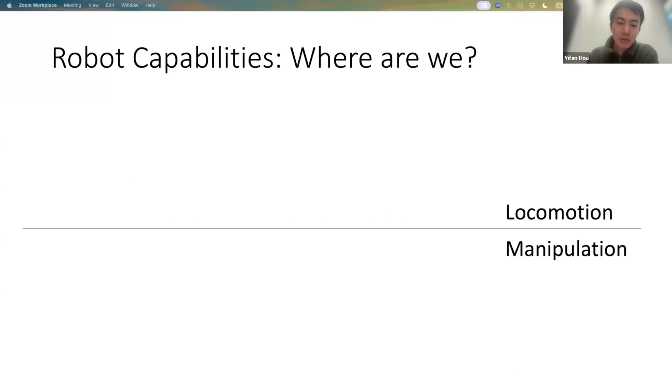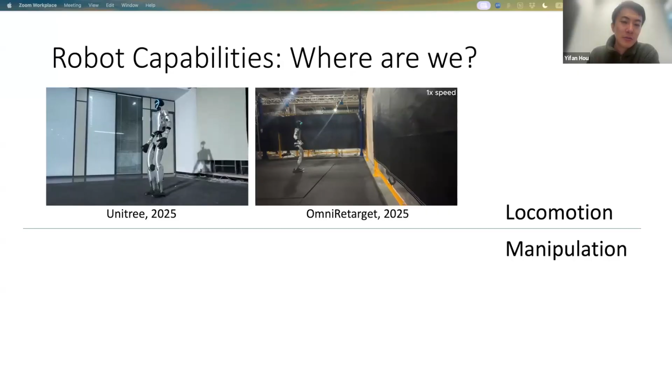This year in particular, we have seen so many interesting demos coming out from research labs and startups. A lot of people now believe robotics is close to being solved. I have a similar feeling when I look at those robots doing parkour and very impressive motion skills that I cannot do myself. But I got hesitant when I look at the state-of-the-art robotic manipulation demos.

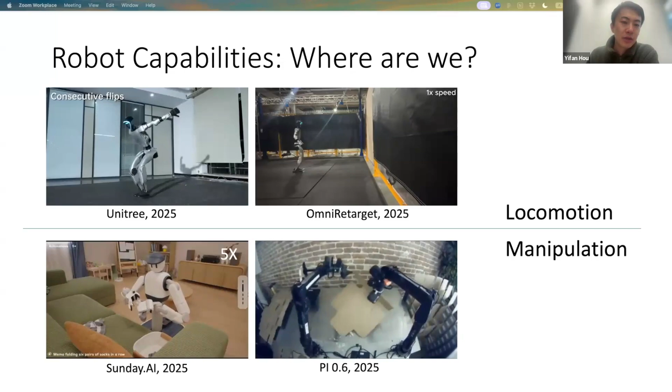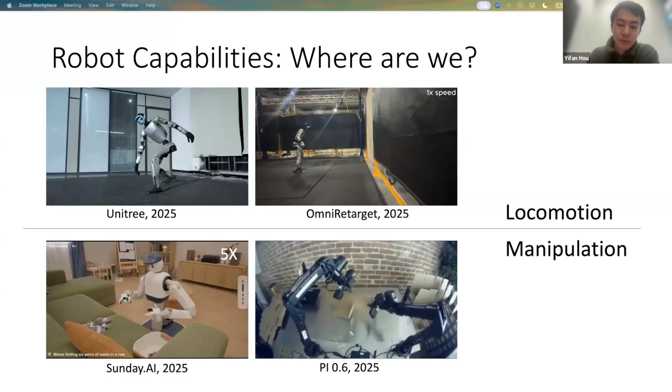To be fair, these demos are, in my view, extremely impressive. This is from Sunday on the left, and physical intelligence on the right. They both use a lot of imitation learning from a ton of high quality human data, and they are demonstrating autonomous behavior that was never possible before. But if we compare our robotics capability with humans, I think we can safely say that in terms of locomotion, a lot of our robots already have superhuman capability, at least super-me capability.

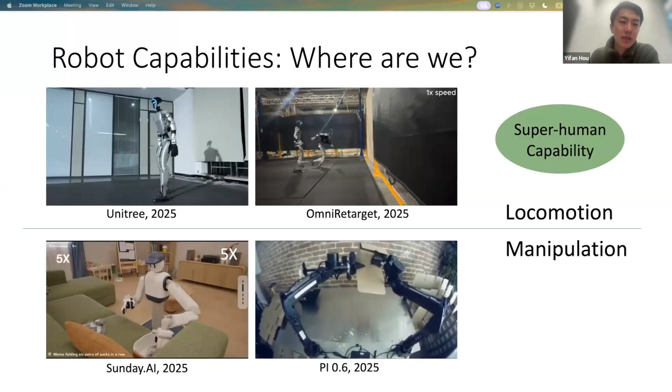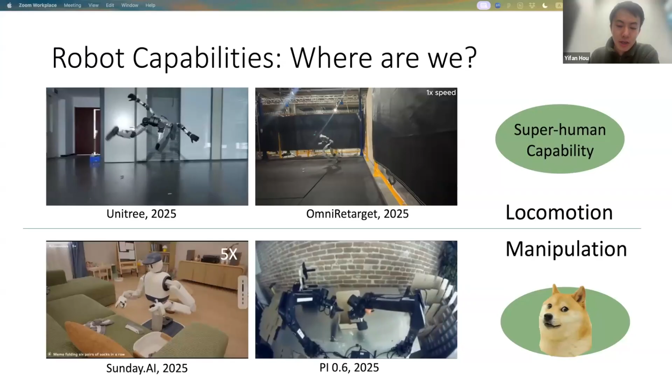I cannot do this. But if I show those manipulation demo videos to my mom, for example, she will still be confused, like why the robot is so slow or why it's taking unnecessary steps. So it appears to me that unlike the rapid progress in the locomotion community, the manipulation community is still struggling a little bit. Let's take a deeper look at why manipulation is so hard.

I think there are two causes of difficulty we need to be careful about. One is the fact that manipulation involves a lot of contact. Manipulation is the process of making and breaking contact, which means a small change or small error in position or force could directly result in failure.

For example, here the robot is trying to install a light bulb. There is a tiny slot on the base where the bulb needs to be aligned into. But the robot policy is off by maybe a few millimeters, so it misses the slot, and no matter how hard it pushes down, it cannot install the bulb.

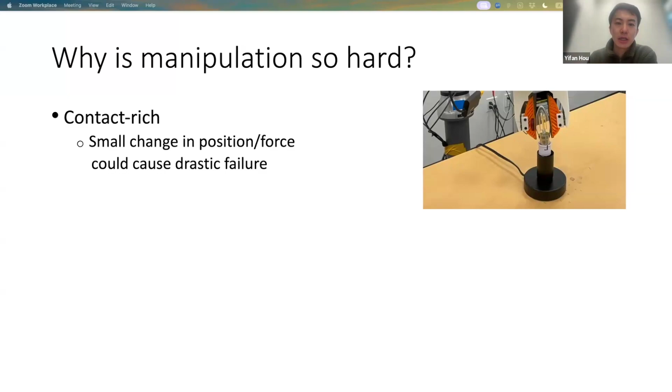The second type of difficulty is the uncertainty in manipulation problems. Because manipulation is a process of interacting with your environment and dealing with items in it, you won't have perfect sensing on the environment. Sometimes you don't even have good sensing on the robot itself. So all those uncertainties just increase the possibility of failure.

So it's really critical for manipulation to be robust. They need to succeed regardless of all those uncertainties. Otherwise, we will never be able to really deploy manipulation systems in the real world.

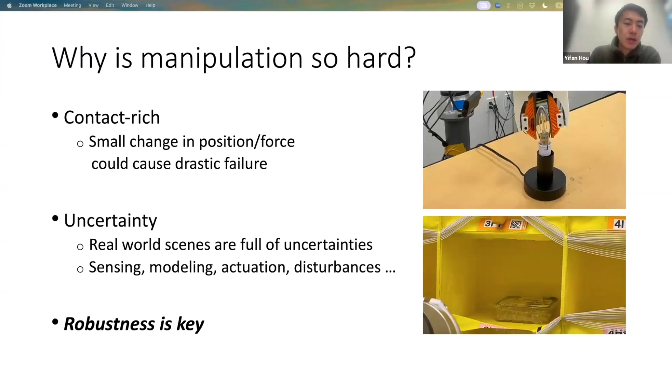A natural question to ask in 2025 is, isn't that just a problem of scaling? A lot of people in industry, especially Google, truly believe you can solve robotics by just doing what they are doing, collecting more data and training bigger models. I think yes and no. If you really have sufficient data, you can do it. But in general, it's a very non-trivial task to collect sufficient data for every single task.

Nowadays, for any non-trivial manipulation task, no matter how big your pre-trained model is, you still need to collect quite a big amount of task-specific data to fine-tune or improve that task. For example, this is a demo from Google Gemini, a very impressive demo where the robot can route belts on pulleys. But for this task, even with a giant pre-trained model, they still needed to collect anywhere between 2,000 to 5,000 additional demos specifically on this task for it to work. That's not very scalable, especially considering the vast variety of real-world manipulation problems.

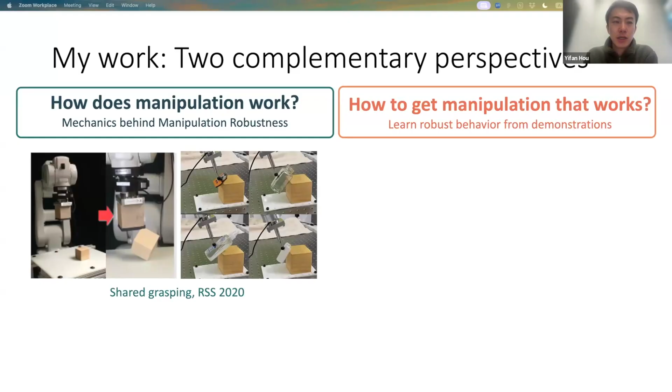In the later half, I will talk about the other, subjective perspective: how can we get manipulation that works, and how can we learn robust behavior directly from human demonstrations? Here I will discuss two works: ACP, which introduces force and compliance control modalities into imitation learning, and CR-DAgger, which improves a pre-trained manipulation policy from human corrections.

These two perspectives support each other. The mechanics part provides principled guidelines about the design of learning systems, whereas the learning system improves the generalization ability of the mechanics-based method, because you don't need to do a lot of modeling.

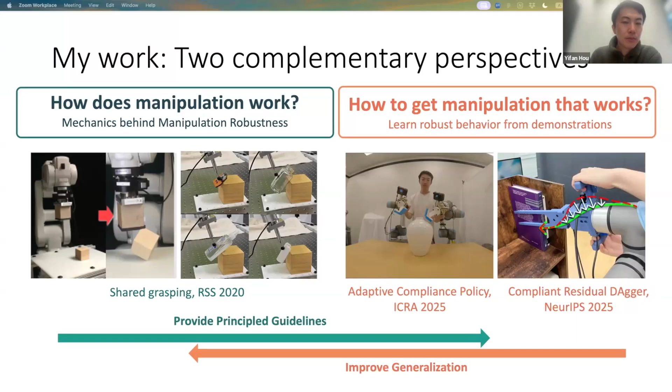So that's the overview, let's jump right to it. Before I talk about the mechanics behind manipulation robustness, I want to first introduce a concept some of you might have seen in my previous talk at Duke. I did a lot of work related to compliance - I think it is the foundation of manipulation robustness.

Roughly speaking, compliance is a model property that describes how a robot's motion responds to force. It's a property that humans are really good at using. If a robot has low compliance, it means the robot is heavy, stiff, or very rigid, so its motion will not easily be changed by external force - like if I'm holding a plate towards myself and there's an obstacle, I can basically push the obstacle away.

But if I'm stopped by some rigid obstacle unexpectedly with low compliance, I'm going to create a lot of force. On the contrary, high compliance basically means the robot is soft or light, and humans are really good at utilizing different types of compliance.

But for a robot, I want to formally show first why compliance is necessary for manipulation, and talk about how we can compute the best compliance profile for a manipulation task.

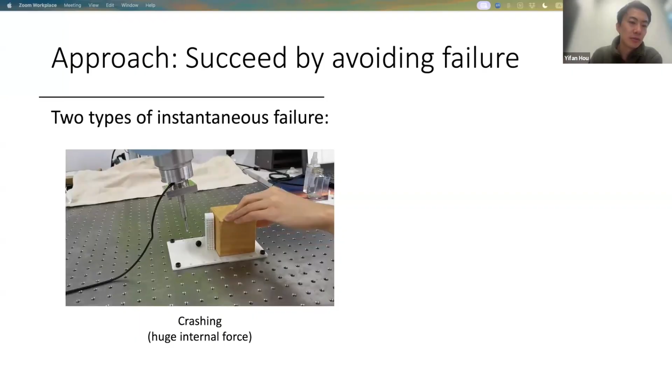First is crashing, which basically means the robot is somehow creating a huge amount of internal forces while moving to somewhere, and that could break your modeling assumption and cause damage. Second is unexpected contact changes, meaning your contact mode might suddenly switch to an unexpected one. There are usually three different types of contact modes: sticking, sliding, or separation.

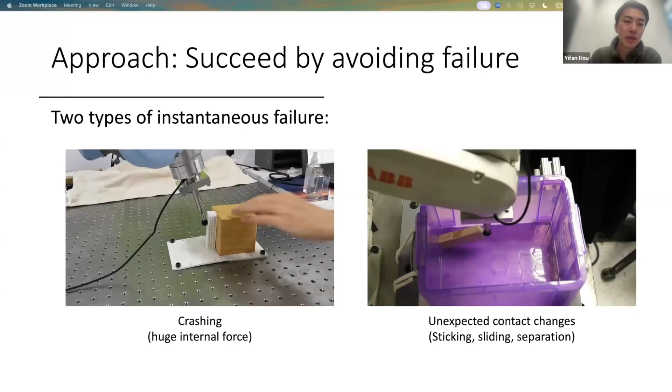This section will be talking about an analysis and solution around these two failure cases.

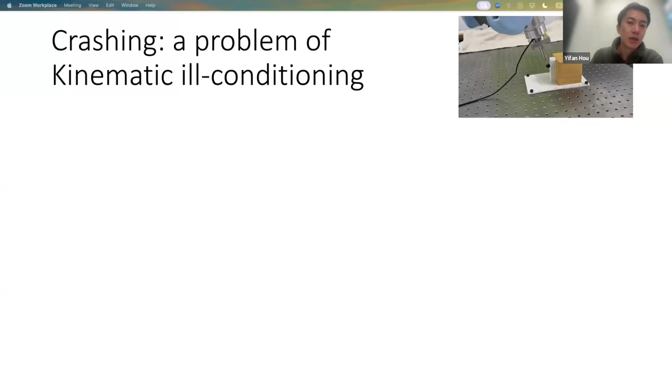For the first failure case, crashing, we want to know why a robot system can have a huge amount of force. That's because even if you do not command a large force to the robot, you can still cause huge internal force because the high stiffness of the robot control effectively serves as a constraint. This constraint might be conflicting with the constraint from the environment. Each manipulation system at any time instant can be modeled by a system of constraints.

The environment constraints basically come from the contact. When there is a contact, there should be no penetration, and if the contact is sticking, then there should be no sliding motion. So they impose some linear constraints on the system velocity at any time instant. Meanwhile, if the robot is trying to follow some trajectory precisely, this control also imposes a constraint on the system velocity. And when these two constraints conflict, they will attempt to create sufficient force to satisfy the constraint, which is not possible. So the modeling will break, and you will see a ton of internal forces.

This constraint-based point of view can help us think about how to avoid this crashing situation. We cannot change the environmental constraints, but we can change the robot control. We can let go a bit of the control from the robot, and this can be done by standard compliance control techniques.

Sorry, I lost connection to my monitor a little bit. Let me start sharing again. Take your time. Can you see my screen now? Yes. Great, great, great. Nice.

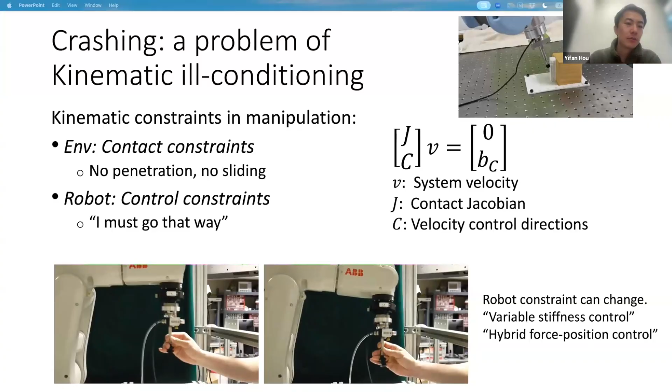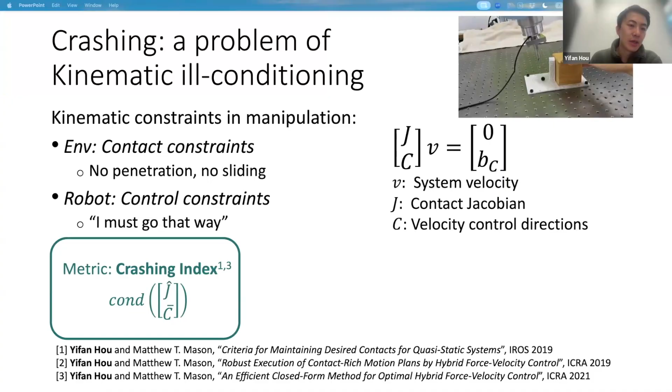Now the robot is only applying constraint in the directions where it is stiff. And if we can change the robot control, we can change the constraint in this equation. From the knowledge of linear algebra, we can use the condition number of this linear system to describe how close a system is to being ill-conditioned. This can be used as a robustness metric, and once we have the metric, we can try to optimize it, finding a compliance control plan that is very robust to crashing.

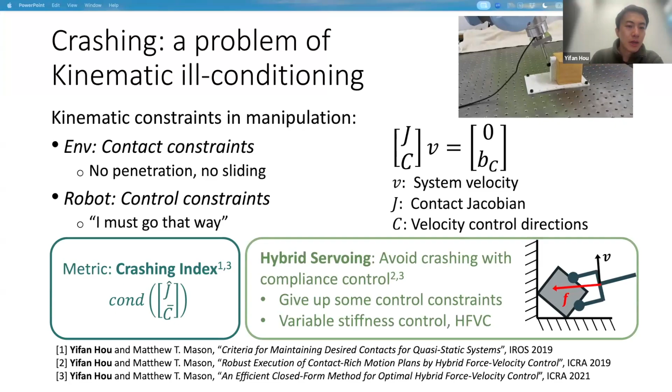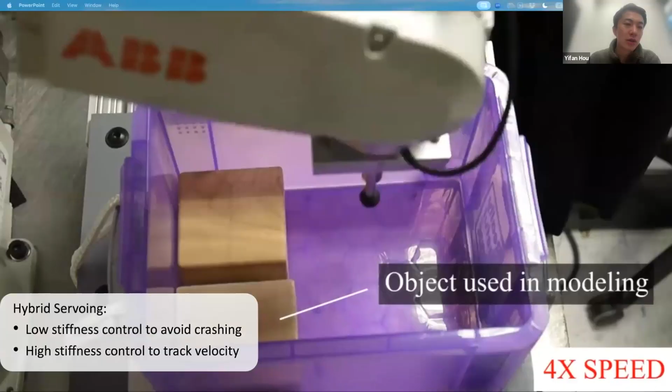I call this algorithm hybrid servoing. Here's how it works: it divides the robot's action space into low stiffness control and high stiffness control. The low stiffness control portion helps avoid crashing and avoid conflicting with other constraints in the system, whereas the high stiffness control can maintain precise tracking of your desired velocity.

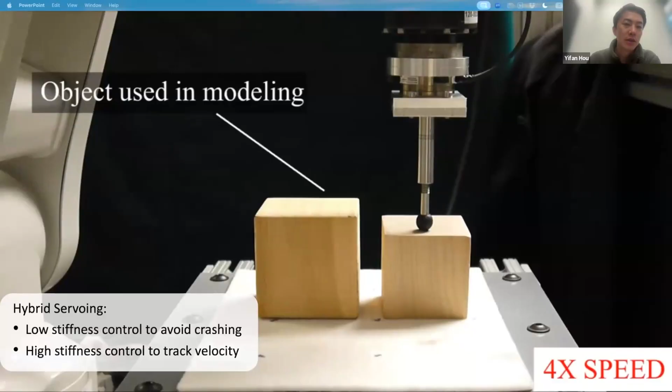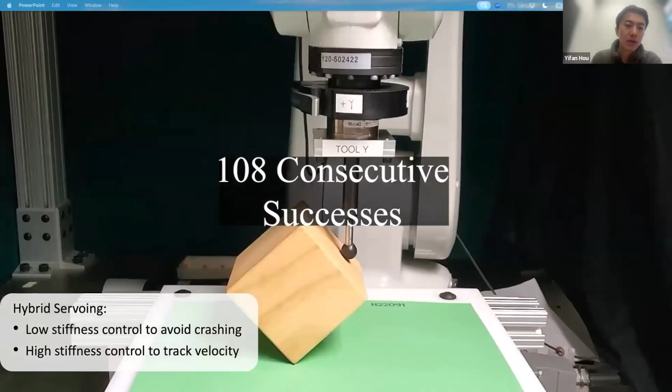As shown in the video, we can execute the desired motion while enduring modeling uncertainties. Since we have a margin of success, we can make the execution very robust. For simple tasks, we can run it many times in sequence with all successes.

Hybrid servoing seems to work pretty well, but that is not the end of the story. We still have the problem of mode ambiguity, meaning when you are executing the same control, multiple contacting modes will be possible. So you still cannot simply enforce the same desired contacting mode. The key to dealing with that problem is to come up with a distinguishable representation of contacting modes.

The representation I propose is to use the range of feasible forces in the robot range space for each contacting mode. That might be quite abstract, so I'll give you an example. Let's say the robot is a block and the object is another block, and for simplicity let's consider a 2D case where we can model the mechanics of the system with 4 contacting points.

Each contact point could be in one of the 4 contact modes. We can draw the range of feasible forces that can possibly be exerted by the robot, and it will be a 3-dimensional range space. In this range space, we will see a cone.

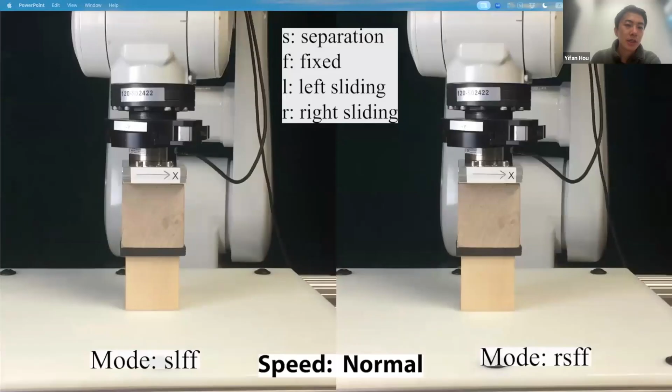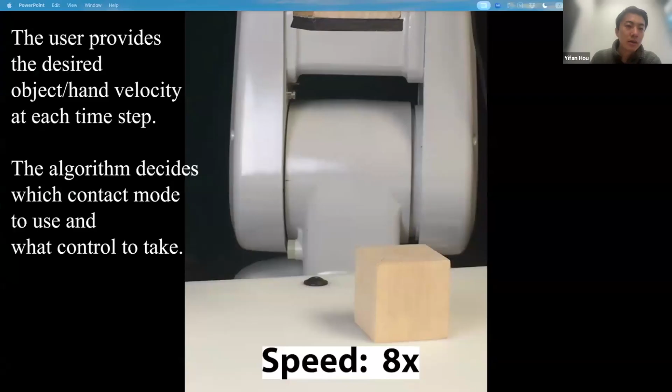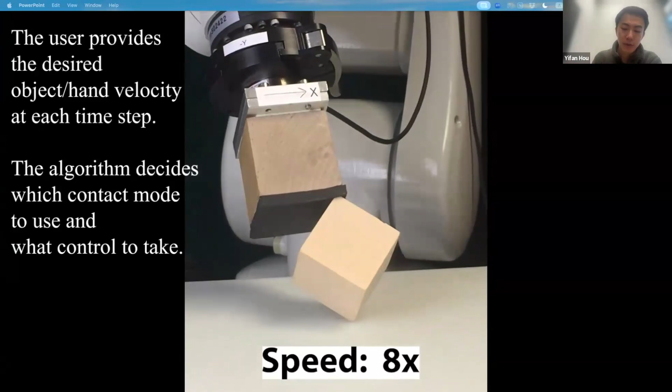Here are some examples of applying shared grasping to different contact modes, where the computed control can safely execute all the feasible contact modes in this example. And you can sequence different actions together to achieve some pretty difficult motion, like lifting and flipping this block, which is pretty difficult to do even with a human hand.

A natural extension of the stability margin is to improve motion planning. So we can do control, but can we extend that to a longer horizon planning? This is in collaboration with Xianyi, where we incorporate the stability margins in sampling-based planning.

If you are familiar with sampling-based planning, it is an iterative process where we iteratively try to grow a tree from the initial state to a goal state. At every iteration, we randomly sample a state in the robot's state space. Then we find the node on the existing tree that is closest to the newly sampled node, and try to grow this node towards it.

We make 2 key changes. One is that we not only grow one path, we enumerate all possible contact modes at this node and grow a path for each of them, so we can have multiple branches at the same time. Then we evaluate the stability margin for each of the new branches and trim off the fragile ones. This way, we can run sampling-based planning while maintaining a very robust tree.

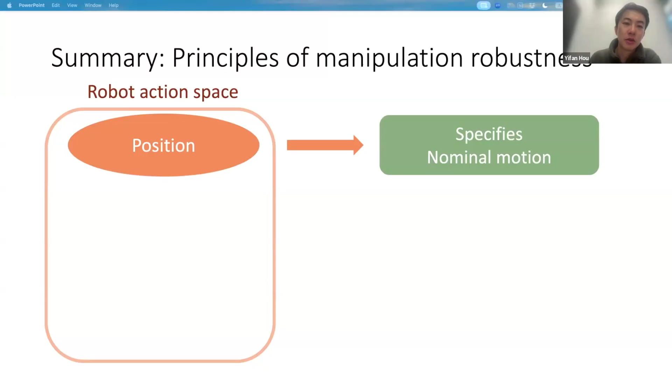A quick summary of the principles of manipulation: we are basically trying to fully utilize the robot's action space. Most existing work already uses the robot's position to specify the nominal motion, but in addition, we show that you can also specify a compliance profile using hybrid servoing, which helps you avoid kinematic ill-conditioning or avoid crashing. Lastly, you still have some degree of freedom in force control, and you can use that to help you select a contact mode reliably.

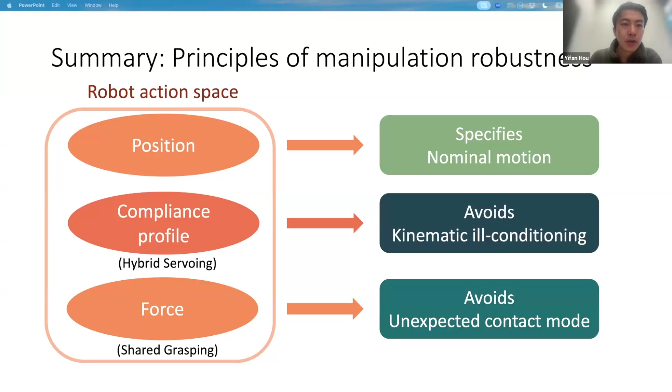Any questions so far for the first part? Cool, I guess this part is very easy for you guys.

So we talked about the mechanics, let's move on to the second part, a more subjective perspective. From the model-based analysis, we know compliance is very useful, and I thought that was just common sense, but I'm surprised to know that in the learning community, most people don't do that.

In 2023 to 2024, there were a lot of emerging imitation-learning-based visuomotor policies, but most of them are purely position-based — they just map vision to position. They're missing force and compliance. This is not sufficient or complete for describing manipulation.

So I tried to give this capability back to imitation learning, by first taking a popular existing imitation learning framework, the diffusion policy, and adding force input, force encoding, and force output to it. In addition, we also let the policy predict compliance parameters. All the outputs — force, position, and compliance parameters — can be executed by any standard compliance controller. The key challenge here is how do we compute the compliance parameters?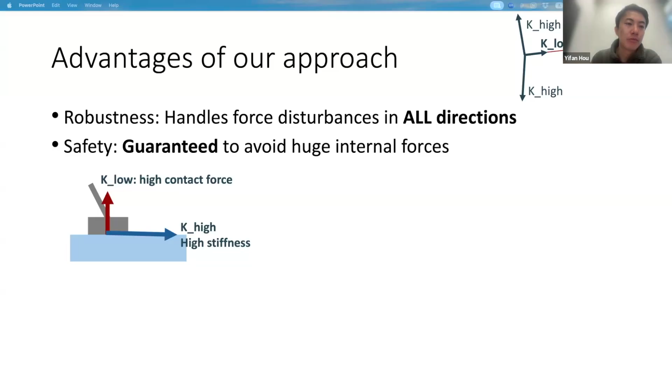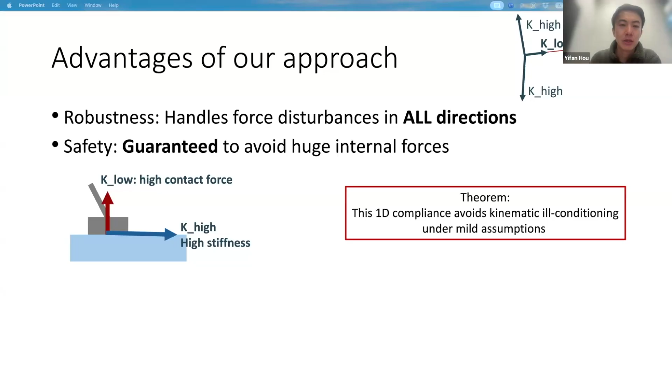Secondly, under mild assumptions, we can prove that this choice of compliance profile can avoid crashing. It will not cause kinematic ill-conditioning. Thirdly, this choice enables us to use a pretty compact and intuitive action space.

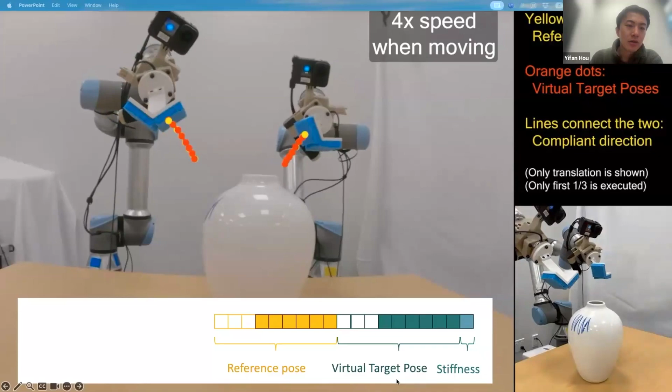So this is what the policy predicts. It predicts a reference pose, which is the same as a typical robot policy — this is where the robot is supposed to be — and also a virtual target pose. The virtual target pose is where the robot controller attempts to go to, and a stiffness value for the one-dimensional high compliance control.

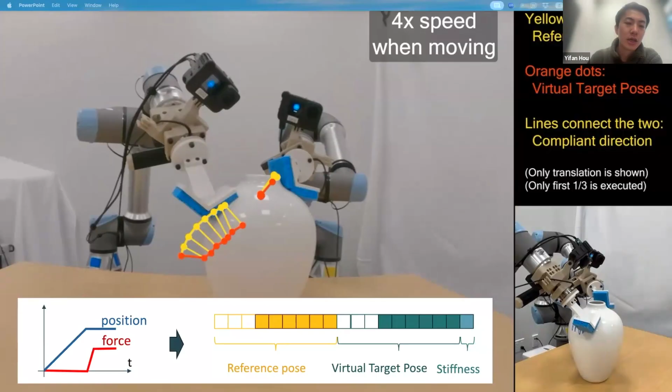So all of these parameters can be computed efficiently from force and position data. We can quickly process the imitation learning data and obtain the labels for those actions.

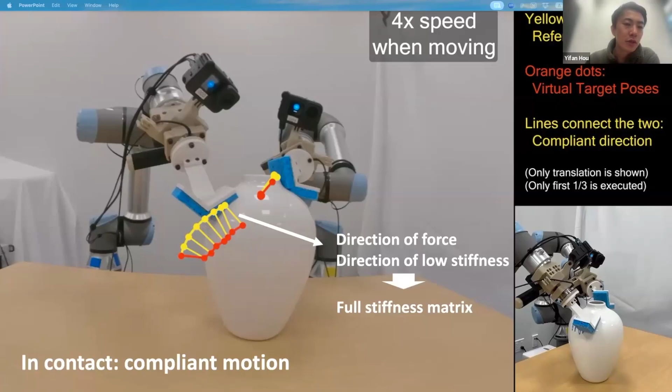Here the light yellow dots represent the reference poses, while the darker orange dots represent the virtual targets. When the robot is in contact, these two types of trajectories usually deviate. There is a difference, and their delta represents the direction of desired force and the direction of low stiffness. We can use this information to reconstruct the full stiffness matrix. When the robot is not in contact, these two groups of points coincide. This basically means that the policy's behavior is the same as a position-only diffusion policy, so it can have precise tracking when there's no contact.

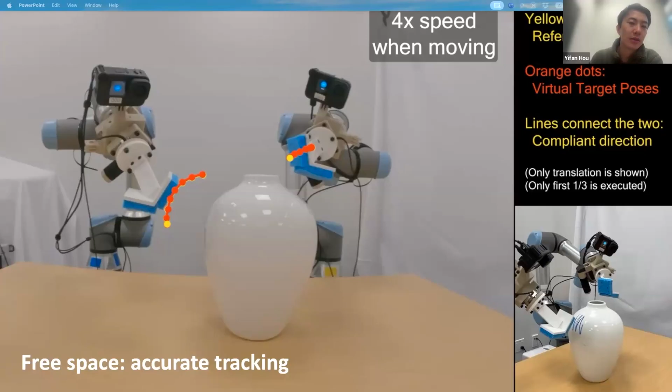Any question here? This is usually the most confusing part.

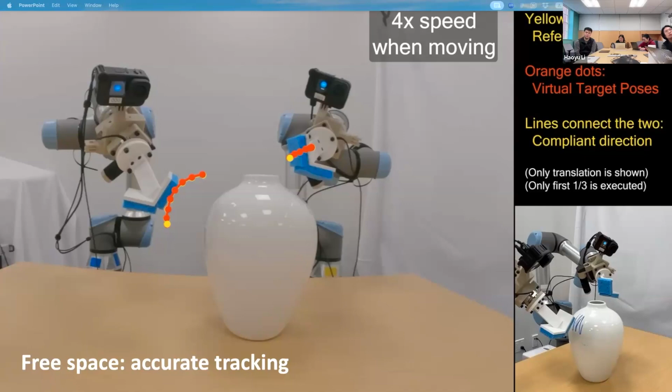I have one question: the K parameter is always changing during the process? Yes, the K parameter is changing both spatially and temporally. So basically, you collect demonstration data just like any imitation learning, and then you post-process the data you collected. You post-process it by going from the beginning to the end, frame by frame. For every frame, you look at a filtered force magnitude and force direction, and you can set the robot's high compliance direction to be aligned with the force feedback direction. You continue this process until you finish processing the whole trajectory.

Another question: during all the wiping motion, how do you control the force? Is the force very similar in your dataset, or if it is different in your dataset, will the K also change?

So the magnitude is implicitly represented by the distance between the virtual target and the reference target. When they're closer, the smaller the expected force is. The larger the difference you see between these two, the larger force the robot is expected to use.

So F equals K times delta X. So my concern is...

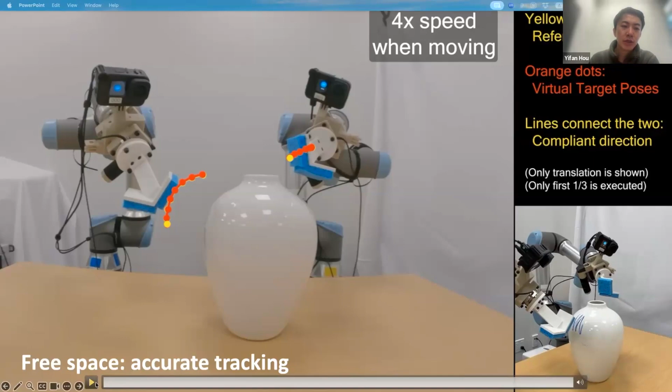So if the force will change during the process, where we have different forces wiping this, the force will be different. The force is something like a regression from your training data. The contact force will not be constant. As you can see here, as you finish wiping, the delta distance gets smaller and smaller, which means your contact force is expected to be also smaller. I see, I see.

Thanks, great. So, go ahead. Question: on the assumption of a high compliance profile in the direction of the force, have you seen any counter examples that make this assumption not ideal?

Yes, we actually find there are situations where this assumption is not the best choice. For example, in planar pushing, especially when pushing heavy items, you can feel a large force from friction. But ideally, the robot should still be using high stiffness because the force is not increasing.

So that is something our heuristic does not work for. This heuristic works the best when the forces that the robot feels come mostly from contact forces. But if it comes from gravity and friction a lot, then this assumption does not work.

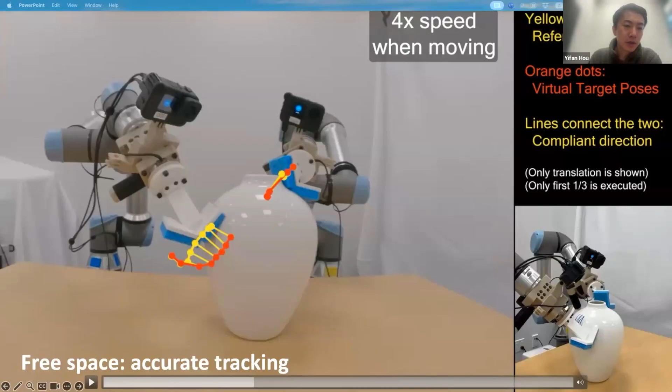And for computing the virtual target, let me briefly talk about it here. So you look at your data, which only contains position and force. And for every frame, we look at whether the force magnitude is big enough. If the force magnitude is small, we believe the robot is not making contact, so the robot does not need to be compliant at that moment.

So then we can set the stiffness to be high in all directions. If the force is pretty big, then we look at the direction of the force vector and align the low stiffness direction to be the same as the force feedback direction.

From this vector you can construct an orthogonal basis. So for all the other axes in this orthonormal basis, which are like the two arrows here, we just set the highest possible stiffness that the robot can execute. And now this is how we construct a stiffness matrix. This is maybe in a relative frame aligned with the force feedback, and you can convert it back to the world frame, or whatever frame you like, by doing a coordinate transformation on the stiffness matrix.

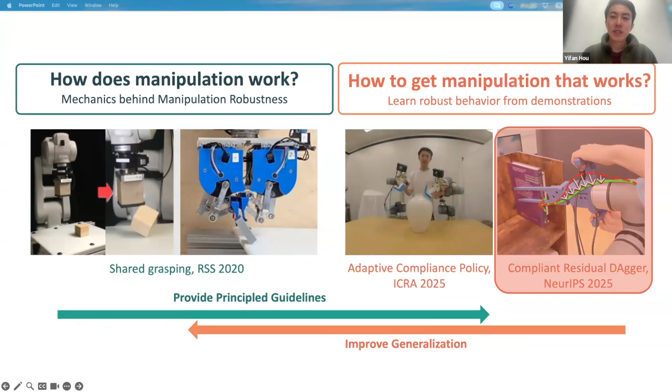Okay, so we'll talk about the compliance policy. This is how we do imitation learning in general. So the last step is: how do we reach proficiency for imitation learning policies?

This is important because a lot of the time, in order to make imitation learning work, you often need to iteratively collect data. Just like we said before, you need to deploy the policy, see that it does not work in some way, and add more data. So this iterative process can be quite tedious. I guess that's one of the reasons why Google needs 2,000 to 5,000 demos per non-trivial task.

Our key observation is that for imitation learning policies, even when they fail in a reasonable way, they are usually only off by a few millimeters or a few centimeters, and it's very easy for humans to tell how to correct the policy. So we try to let the robot learn from human correction data.

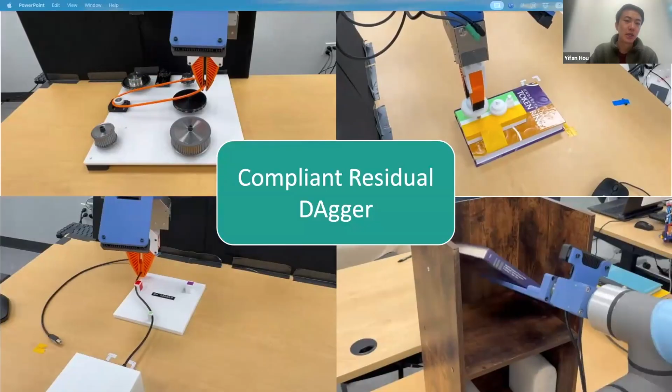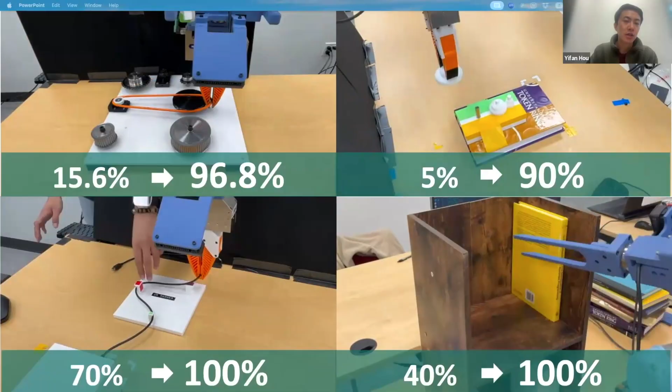This is Compliant Residual DAgger. It's a system to let humans effectively provide corrections and let the policy learn from the correction data. We show that we can improve success rate of four challenging contact-rich manipulation tasks to close to 100 using only 50 to 100 episodes of human corrections.

So how do we do that? This process of iteratively providing more data is generally referred to as DAgger, data aggregation. It's not a new method, it's very popular especially in autonomous driving. But there's no principled guideline about how to do it for contact-rich manipulation.

So to use DAgger for manipulation, we make two contributions. One is a system to let humans effectively provide correction, so we can collect high quality correction data. And second is a method to use the data to update the policy. Considering time, I will go a little bit faster.

So the traditional way to collect data is by taking over using teleoperation. But taking over correction has a problem. At the moment of control authority switching, you can easily introduce some force discontinuity or even force disturbances. So the data will be more noisy.

Another problem is that when you take over control from the robot, you have no idea what the base policy is trying to do. So you can potentially deviate very far away from the original distribution. Then the correction behavior will be more difficult to learn. So we have a distribution shift.

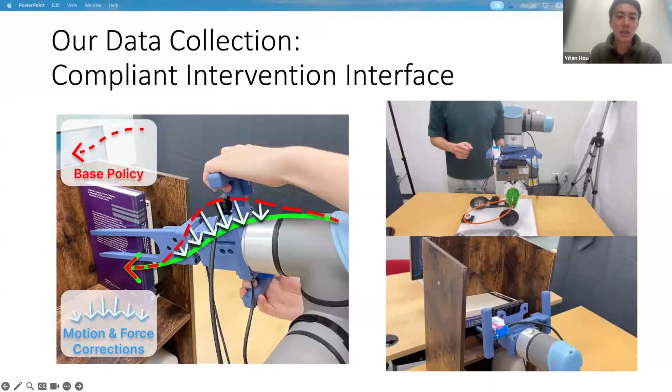So instead, we design a compliant intervention interface where we execute the base policy using a compliance controller. So the base policy can execute continuously without ever being interrupted. And when you want to provide a correction, you just apply force directly onto the robot. We have some handles on the robot end effector.

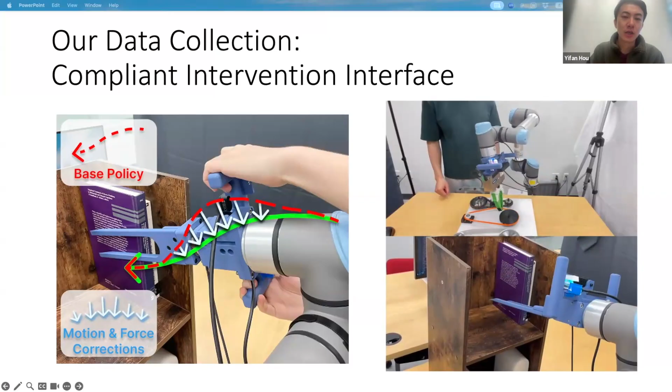And this way, the correction will be accurate because you can clearly see what the robot is doing and apply force in the direction you want directly, not through any teleoperation device. And the correction data will be very smooth, because humans are very good at applying force gently.

In order to support a compliant intervention interface, we use two force cell sensors on one robot arm, one for compliance control, the other for measuring force precisely.

On the control side, we execute the base policy using a virtual spring controller, where the control forms a virtual spring around the base policy output. The further away you deviate from the base policy, the larger resistance force you will feel, so it's intuitive for the operator to stay close to the base policy distribution.

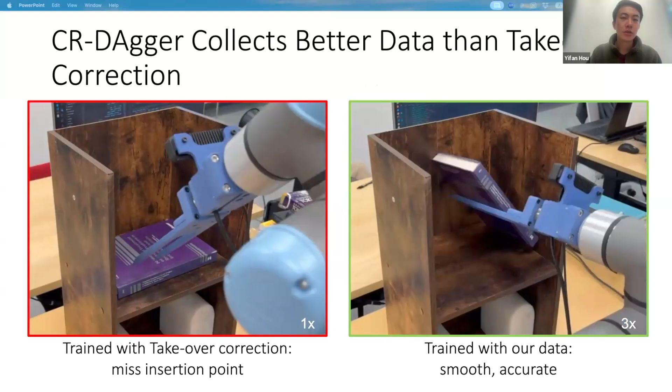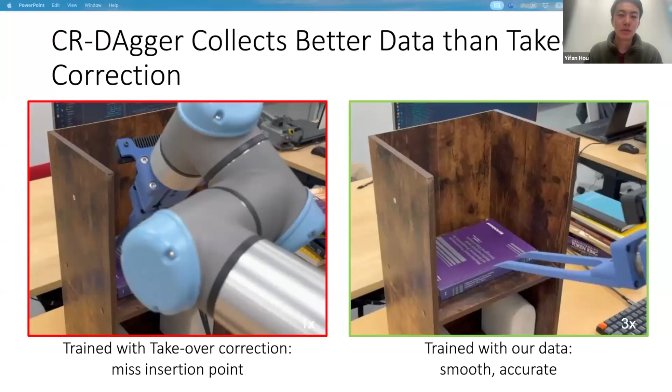And so we can show that the data we collected—oh, sorry, my monitor is disconnected again. I only have a few last slides to show. Okay, I will try to share without the monitor. Share entire desktop. Can you see my screen now? Yes. Oh, great, great, great.

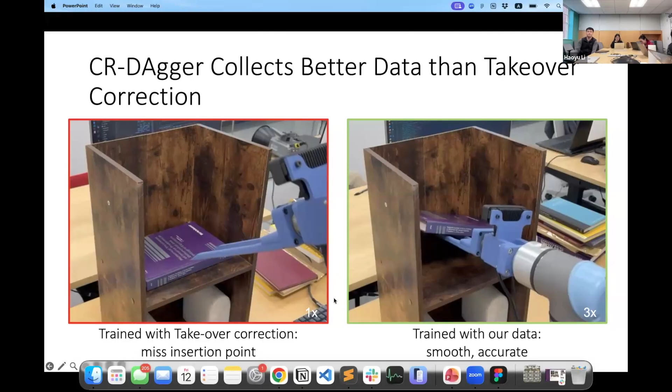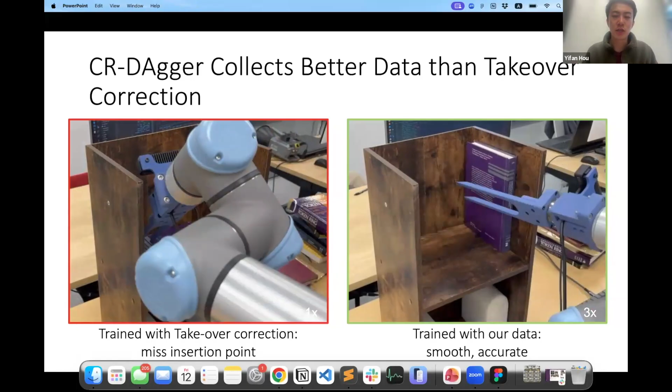For the same type of policy, if we train with different data, we can show that data collected with our interface produces more smooth and accurate motion, whereas the policy trained with takeover data has larger error, larger noise in their motion, which can often lead to failure.

Once we have the high quality data, we try different ways to use the data to improve the base policy, and the one that works best is actually to train a residual policy. One benefit of this residual policy is that since it does not touch the base policy structure, we can add additional modalities to the residual, like force input and force output. So even when the base policy is position only, we can make the residual policy force aware.

We show that this residual structure performs better than traditional retrain and fine-tune. Retraining with all the data you have does improve the policy, but it improves slowly because your correction data is only a very small portion compared to the base policy. And fine-tuning can easily go unstable because it is sensitive to data distribution, and the correction data distribution is usually slightly different from the base policy distribution.

Okay, so a quick summary. We talked about different ways to introduce robustness. When modeling is available, we can optimize robustness using hybrid servoing and shared grasping. When modeling is not available, we can change the policy structure or change how we collect data to improve the robustness and efficiency of the learning system. And when you have pre-trained policies, you can improve robustness by learning from human corrections. All of these are supported by compliance control.

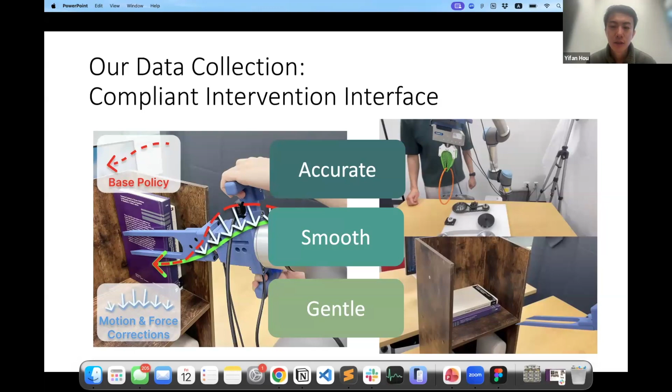I guess maybe you're talking about the switch here. So there's a button to record the timing of human correction. And that is useful for sampling training data from the dataset, because we emphasize and put more weight on data right after the beginning of corrections.

But that's only during training. The policy itself does not have any if-else condition.

And does that require your base policy being executed at relatively high compliance? Yes, we use a medium level compliance to execute the base policy. So when there's no human correction force, the policy can still be executed quite accurately. Like we use about 1,000 Newton per meter stiffness. So we found it to be accurate enough.

We use the same compliance also during execution, during the final run when there's no human intervention involved, and the robot is able to finish the task with this compliance control. So it's a trade-off between base policy accuracy and the ease of providing correction. But I think it's not too hard to find a good spot.

Okay, sounds good. Any other questions? Yeah, I have a general question. I want to hear your opinion about synthesizing trajectories with compliance in simulation—basically simulated data. What's your opinion about that?